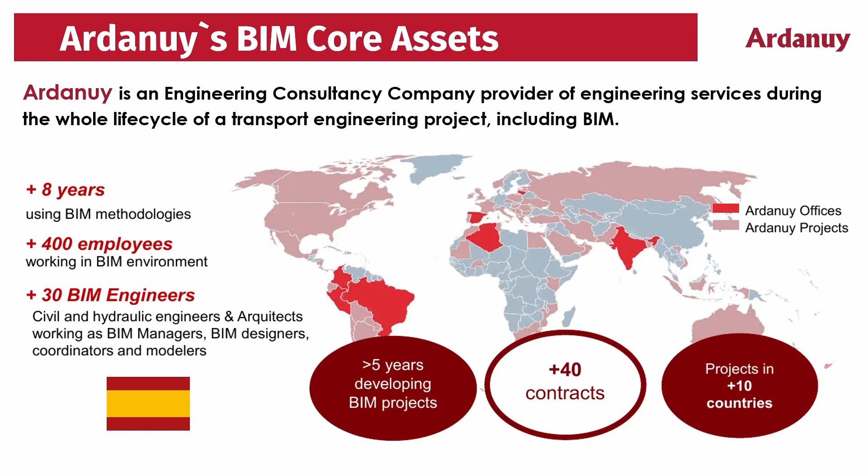Well, now we will be presenting 3 case studies. The first case study will focus on the Albarregas Viaduct, which features 2 symmetrical trough beams.

The second case study will highlight a railway bridge with multiple railway lines. Finally, we will explore practical cases of both road and railway bridges in the generation of superstructure.

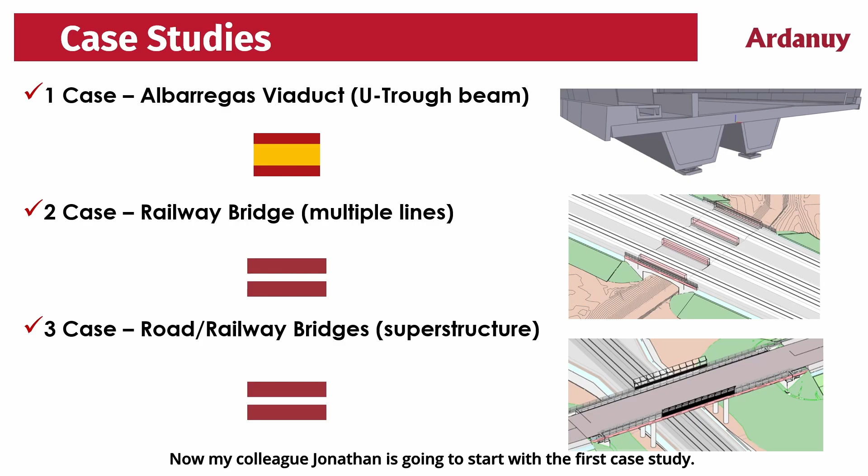Now, my colleague Jonathan is going to start with the first case study. Thank you, Jorge, for your informative and engaging introduction. As mentioned earlier, my name is Jonathan Norato, and I will be presenting the first study case.

We will begin with the Albarregas Viaduct, located in Mérida, Spain. This railway bridge spans 169 meters and features 6 double U-trough girders arranged in 6 spans.

The arrangement is shown on screen. The new bridge is isostatic and has prefabricated trough girders that are 5 meters apart from each other.

On the lower right corner of the screen, it is displayed the current bridge. However, a new proposal will be made to meet the new speed design requirement.

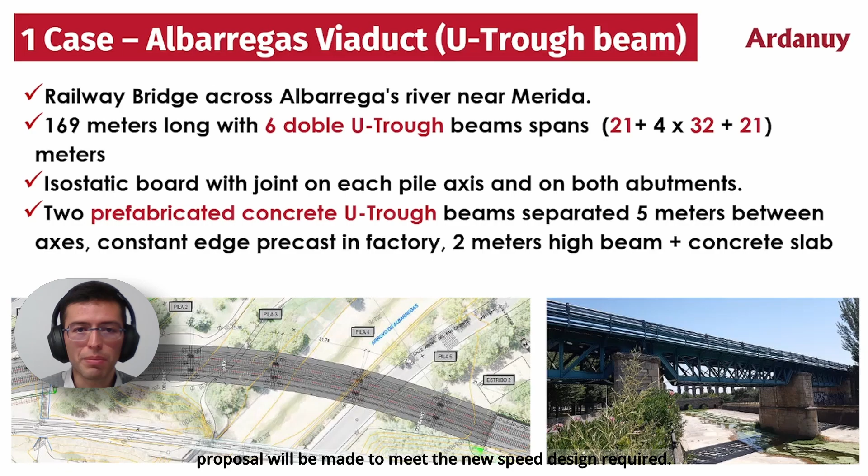To generate the design proposal for the Albarregas Viaduct using Allplan Bridge, we employed a range of tools and features.

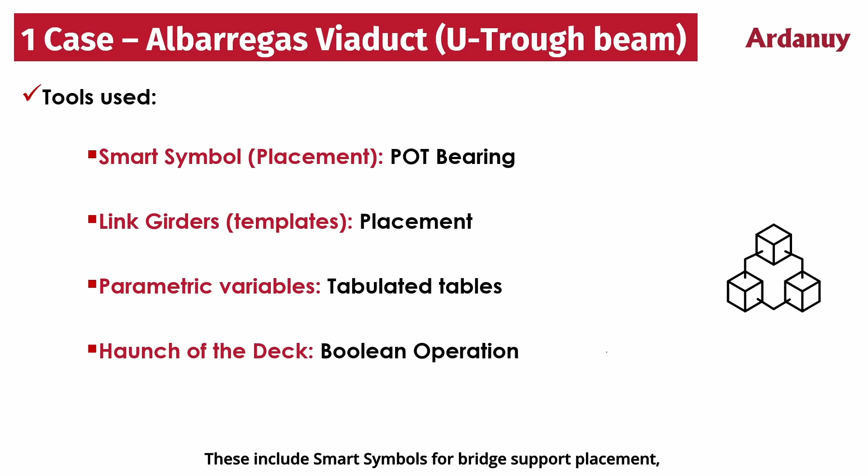These include smart symbols for bridge support placement, link girders for trough-beam modeling, the use of parametrical variables with tabulation of table, and the haunch of the deck, which allows for Boolean operations.

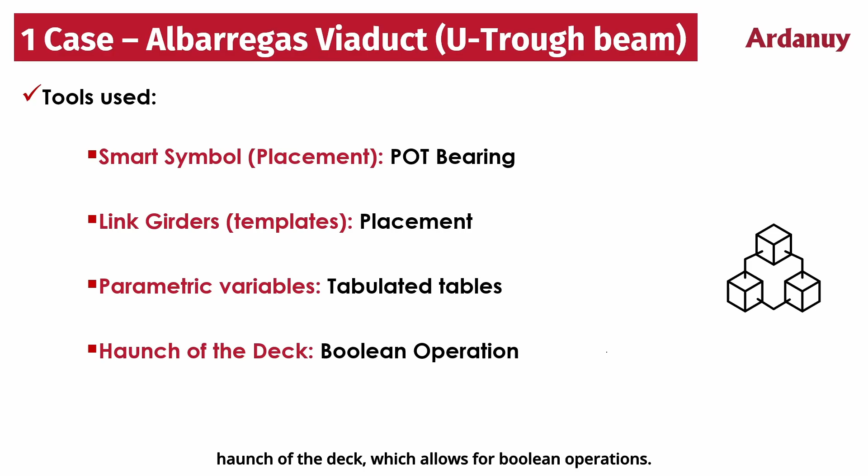As the first step in our design process for the Albarregas Viaduct, we took the axis definition, which were in LandXML format. Using this format, we were able to create an accurate representation of the bridge layout in both plan and elevation, including ground level, section, and the location of support, bearings, abutments, and other structural elements.

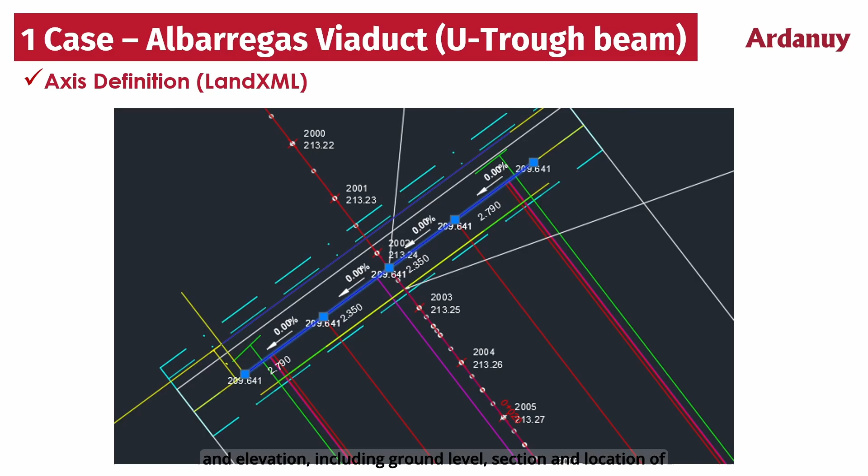This layout serves as the foundation for the rest of the design process. We use a range of tools and features which allow us to accurately define the axis for the bridge.

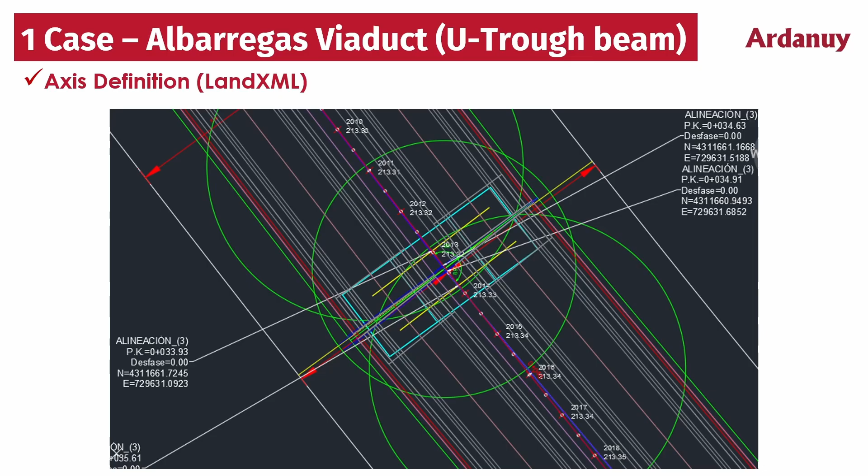Once defined, these axes were exported to an XML format and then imported into the Bimplus portal.

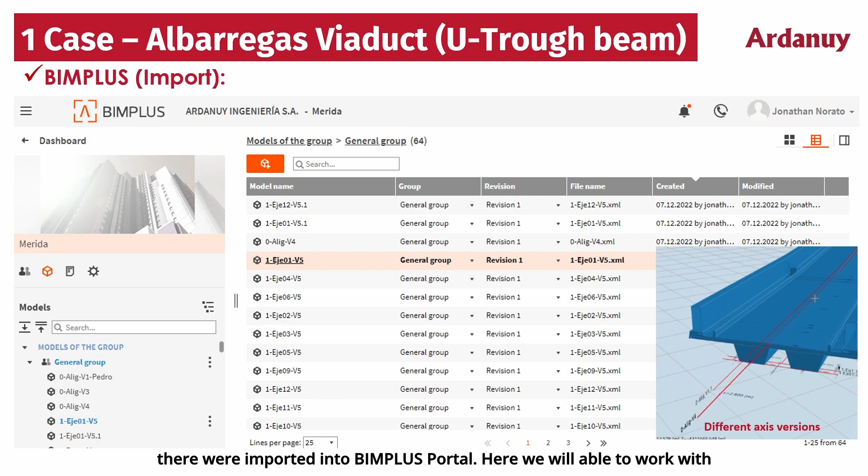After exporting the definition of the axes, they were imported into Bimplus portal. Here, we were able to work with different versions of the design and the tracks of the axis as the project progresses.

As you can see on the screen, we are currently on version 5.

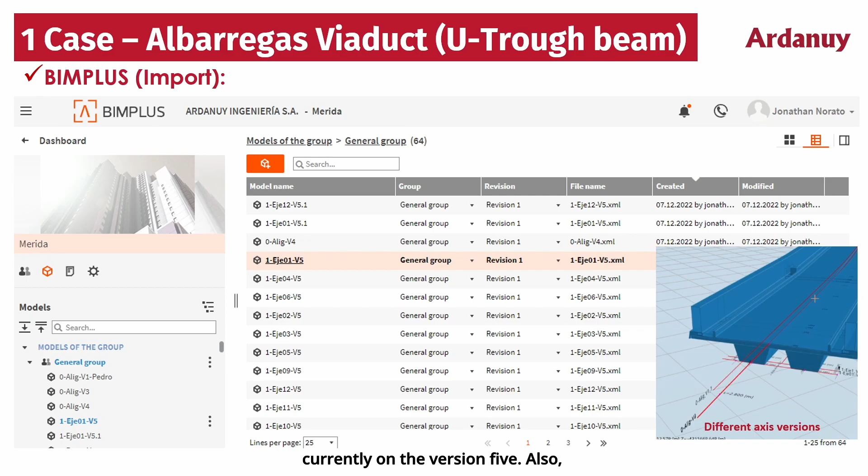Also here, I have a video of Allplan Bridge. Here we can see all the axes.

As you can see, there is the axis of the bridge, and also there are axes perpendicular to the bridge that are used for the link girders.

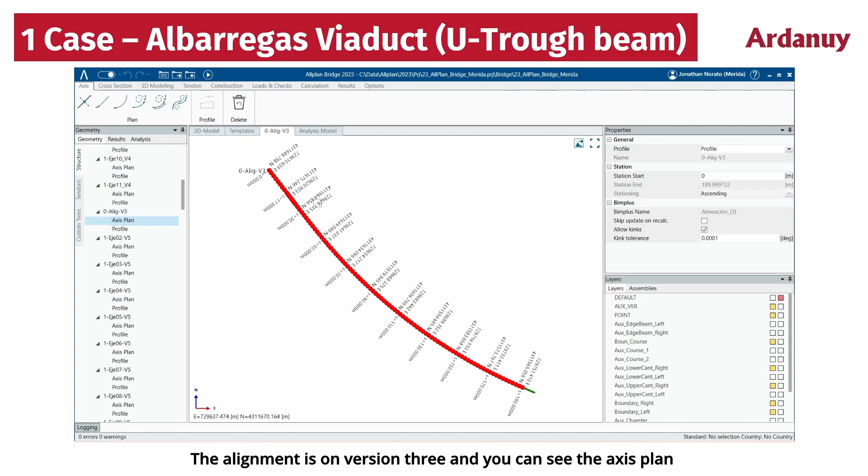And here we have the alignment in version 3, and you can see the axis plan and also the profile as shown on screen.

Another tool used in the design of the Albarregas viaduct was smart symbols, specifically for the bearing pot support. The pot support was inserted as a smart symbol using a cross section for the points located on the right. There is a reference point that allows us to choose the location of the smart symbol. In this case, the section considered was perpendicular to the bridge axis.

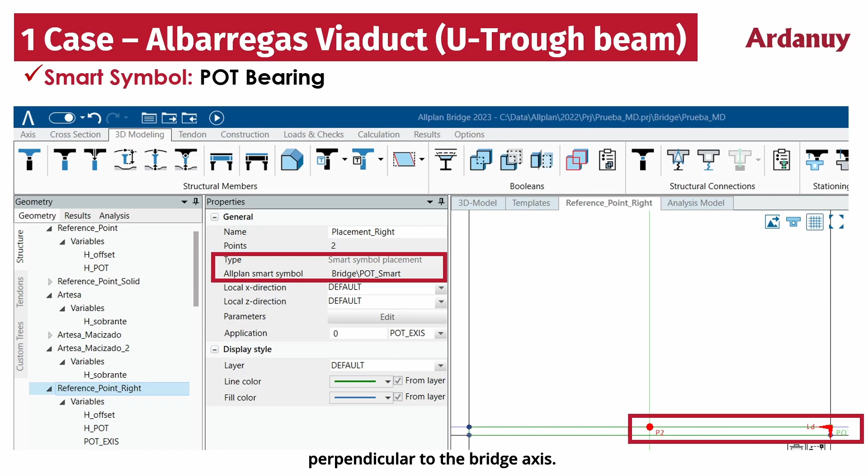Here I will show how this was done. You can see the cross section on the left side, and how the link girder was placed. When we scroll down and go to the reference point on the right, we can see the smart symbol placement on the right side of the screen.

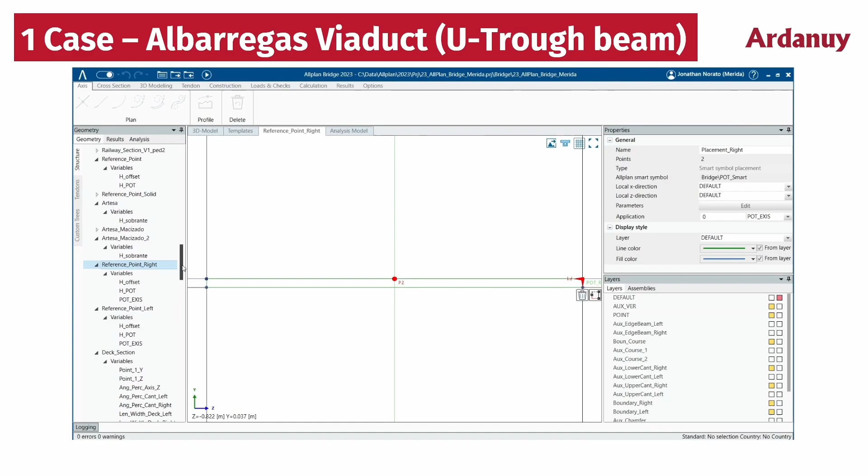We also use parametrical variables linked to tables. The use of tabulation and tables allows for the automatic generation of different lengths of beams, with the corresponding dimension being adjusted automatically.

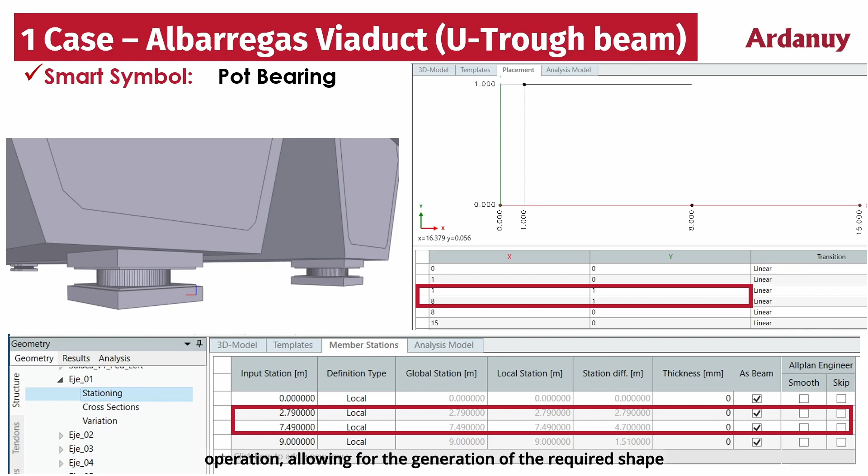Additionally, the haunch of the deck was used for Boolean operation, allowing for the generation of the required shape for the bridge deck.

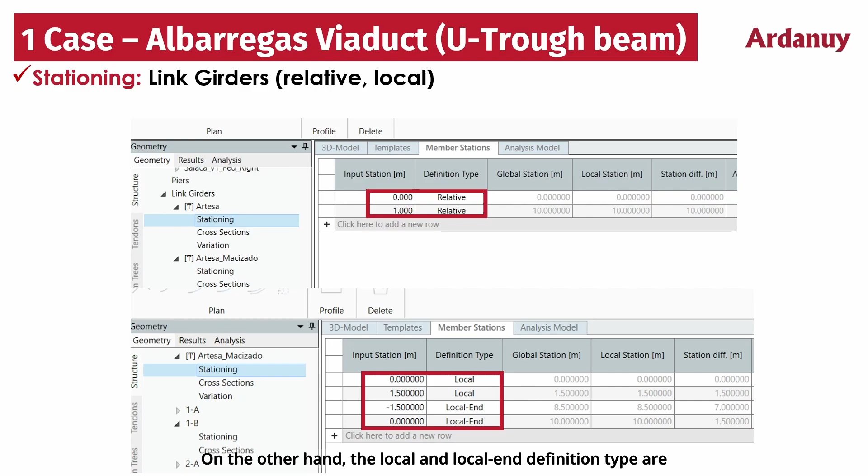We use different types of stationing. Some examples are relative, as well as local and local-end definition. The relative stationing is used when there are reference points that could change and the geometry adapts to these relative values. On the other hand, local and local-end definition types are useful when there is a fixed measure or spacing between model elements.

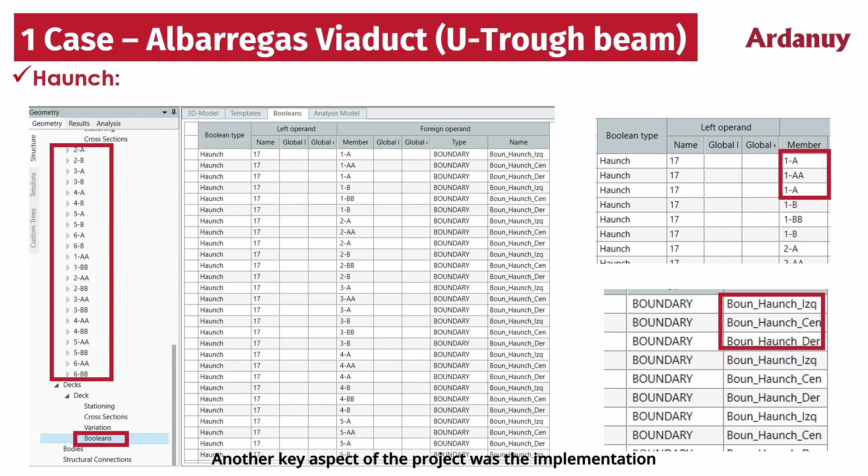Another key aspect of the project was the implementation of link girders and Boolean operation. This allows for the generation of all the necessary beams with a specific name convention consisting of both letters and numbers, as you can see on the screen.

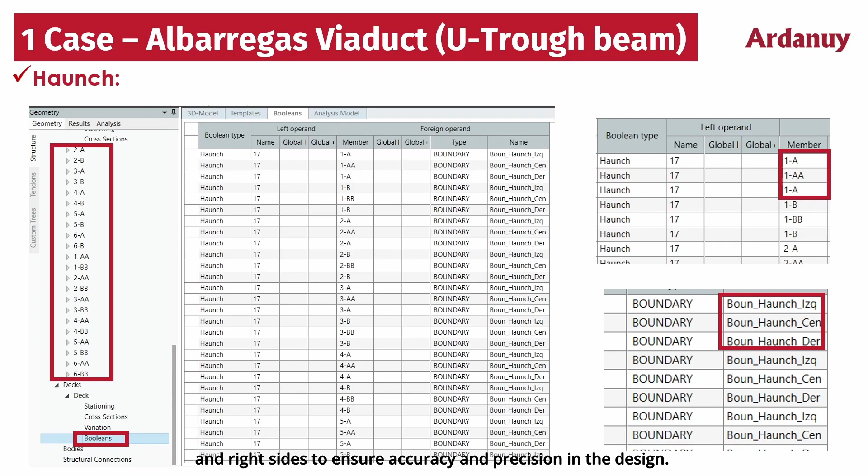Additionally, the team decided to split the haunch on the left, middle, and right sides to ensure accuracy and precision in the design. I will show an example on the next slide.

In addition to the previous function, stationing was also generated to provide a gap between the middle of the section, resulting in the solidification of only the parts near the support, while the rest remains normal, as demonstrated on the screen.

So here I can see the gap and the two sections that were used.

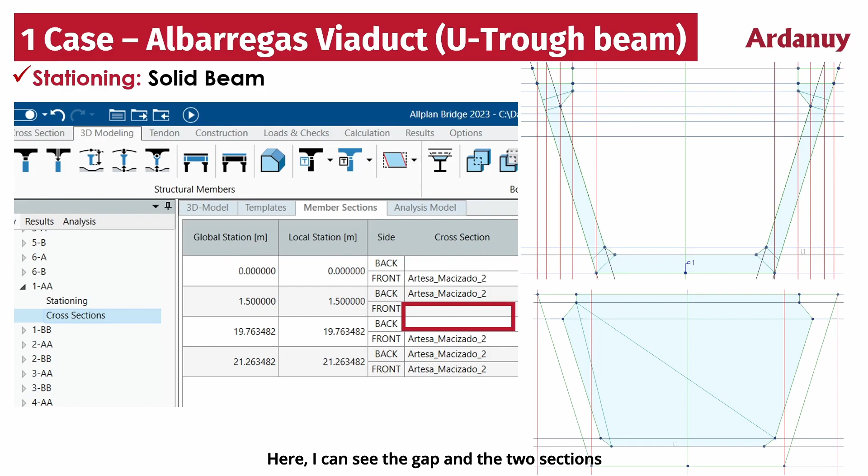On the left hand side, we can see the 3D model generated in Allplan Bridge, while on the right hand side we see the cross section of the pedestals. Finally, on the lower right hand side, we can observe the symmetrical beams.

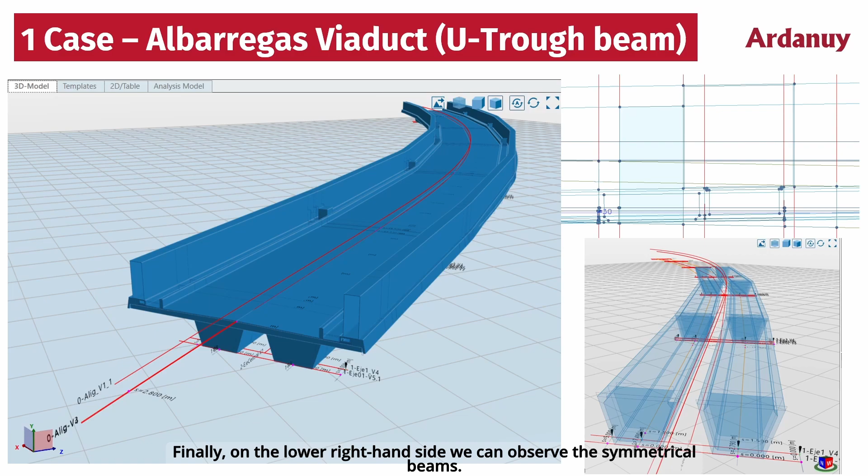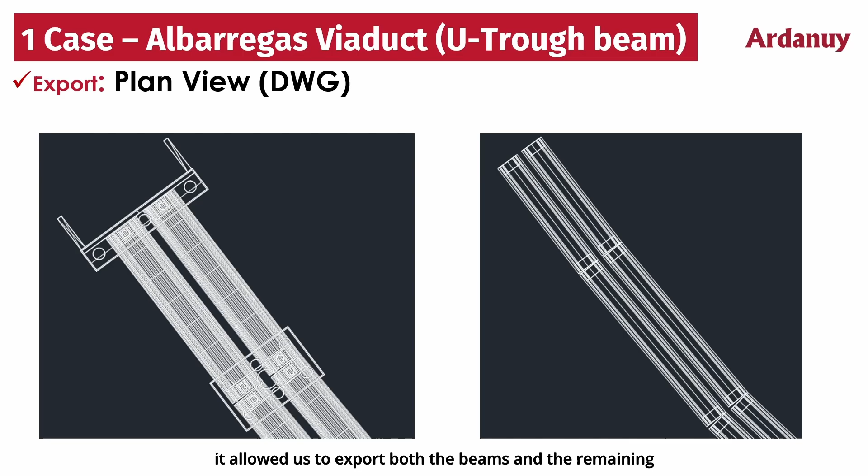Another crucial factor was the DWG export of the bridge, as it was a requirement of the client. So after generating it in Allplan Bridge and passing it through Allplan, it allows us to export both the beams and the remaining components of the plan, as shown in this image.

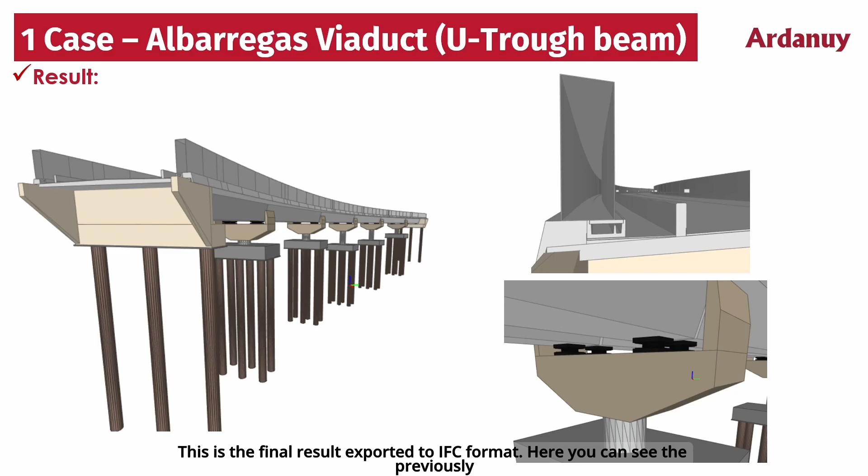Additionally, an isometric view of the entire bridge was also exported as a final output. This is the final result exported to IFC format. Here you can see the previously mentioned structure of the viaduct.

Thank you, Jonathan. Let's continue with the second case study.

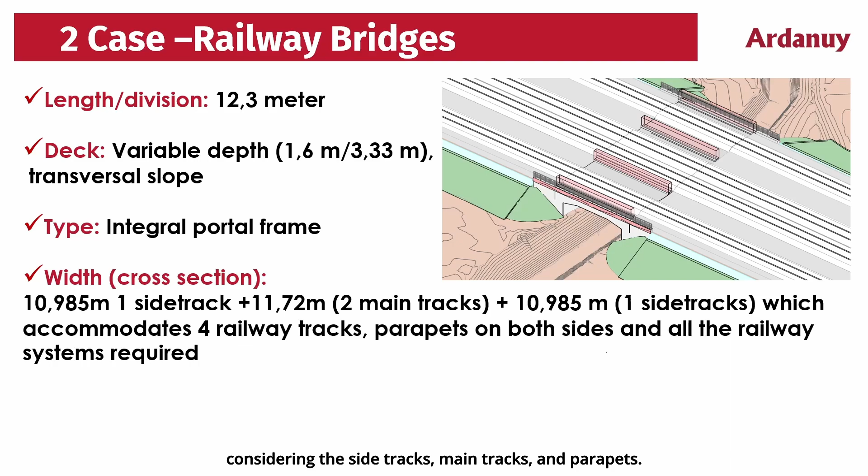This case is a railway bridge. It's a portal frame, made up of a total length of 12 meters. It also has a variable deck and transversal slope. On the screen is presented the width of the bridge, considering the side track, main track, and parapet.

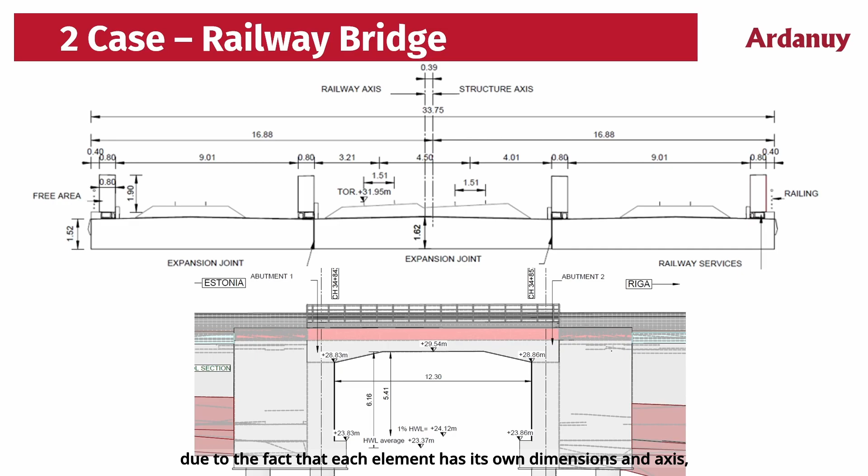In this railway bridge project, the cross-section is a challenge, due to each element having its own dimension and axis, as seen in the elevation, as we will show. This cross-section can be directly taken from Allplan Engineering. We will show how it was modeled.

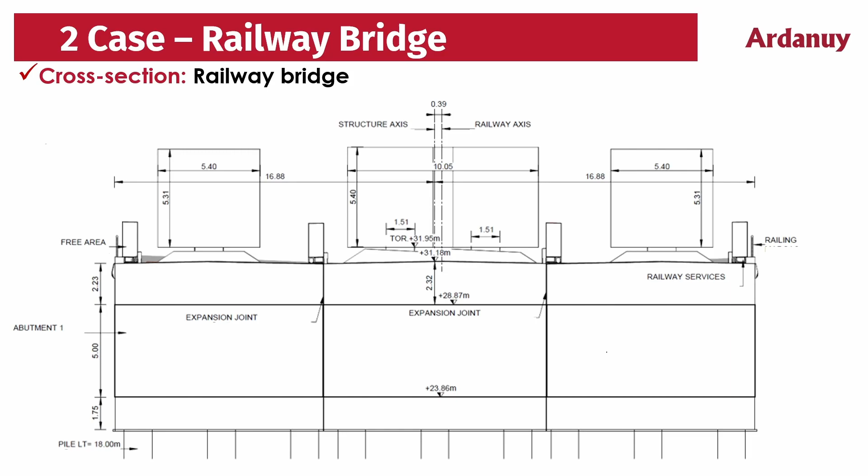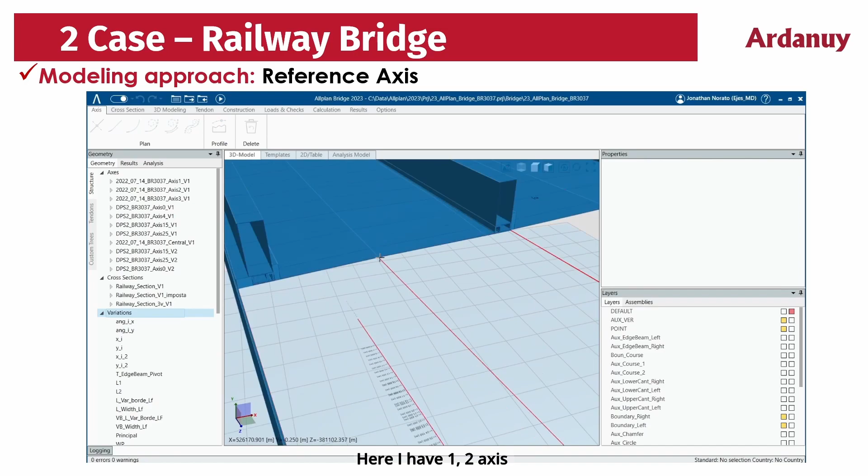We are going to present a different modeling approach to the previous case. In this case, we use a reference axis, as you can see on the screen, and then we have respective axes to some key points. Here we have one, two axes, and there is another axis that was really important to the same process.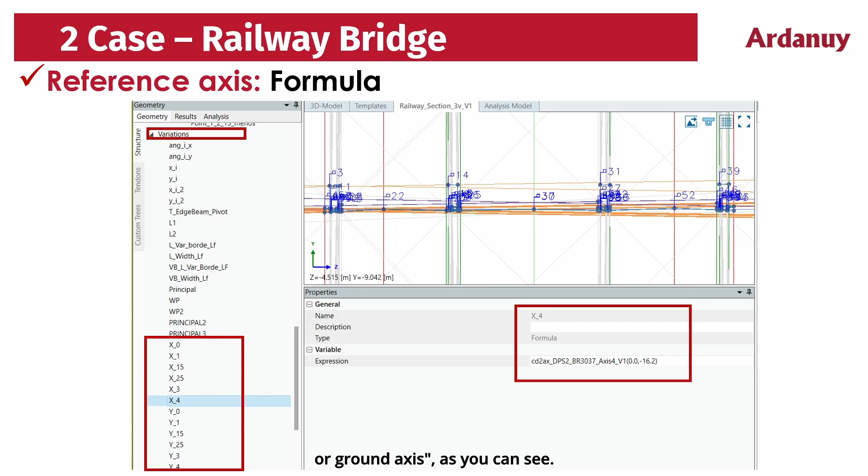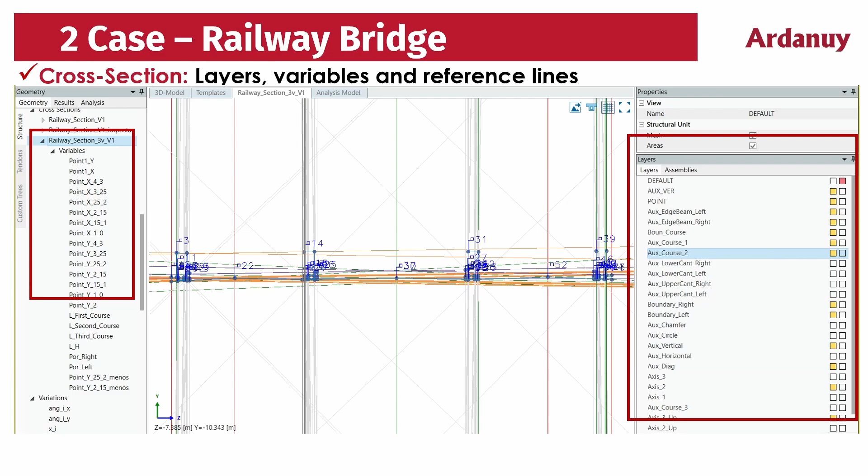Allplan Bridge layer functionality was very beneficial to us, due to the number of lines a model can have, as seen in the following image. On the left side, variables were generated, while the reference of parametric lines are seen in the central zone. In this image, we can see too some of the superstructure elements of the bridge.

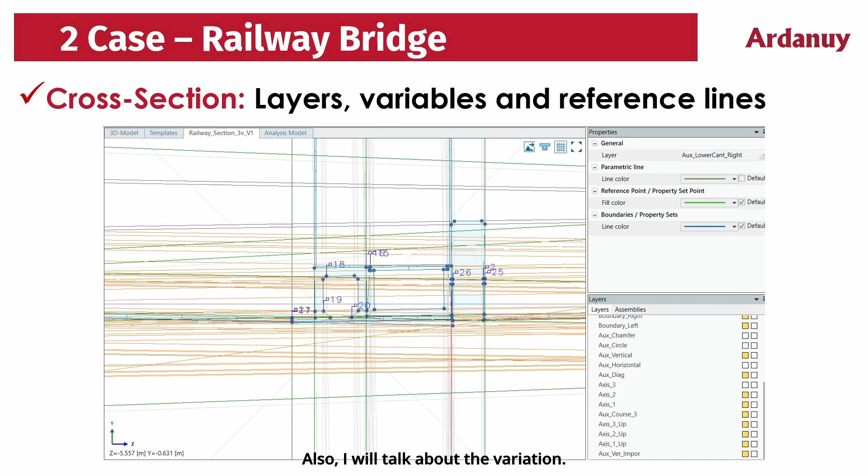Later, we will show the 3D model and how important the layer was to model this element. Also, we will talk about the variation. On the variation and cross-section tab, we can confirm that each section has a different value. This happens because the section is referent to a different axis, as you can see.

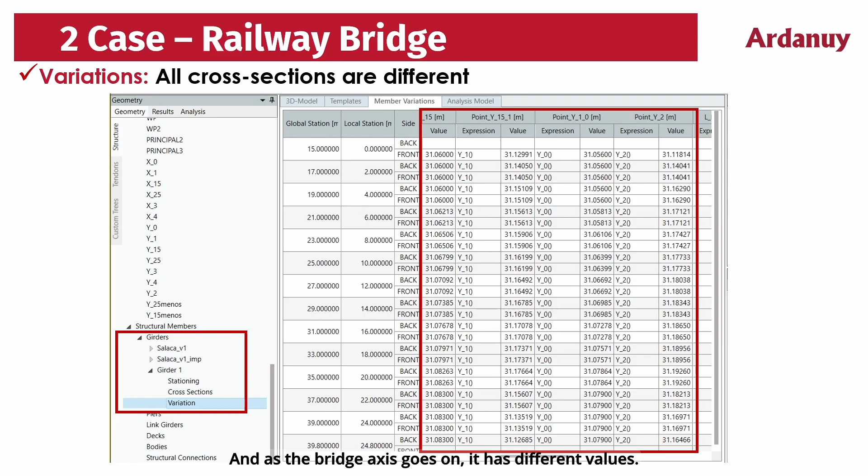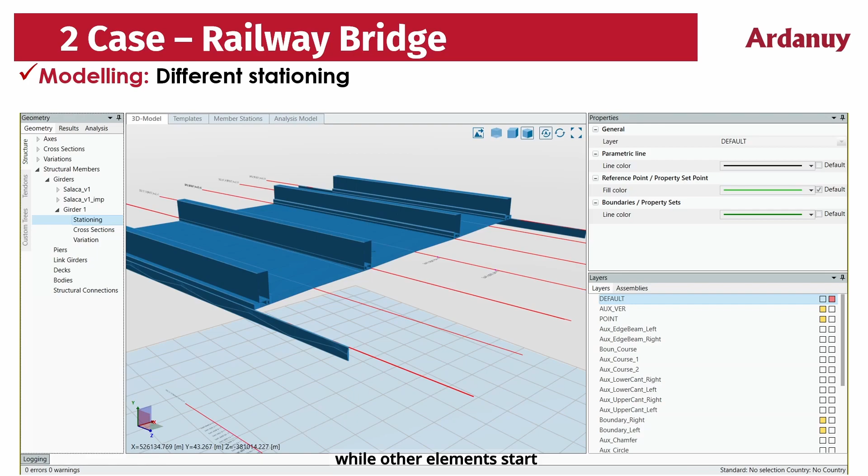We have here the expression, and as the bridge axis goes on, it has different values. For this reason, they will have different sections, and something important is that the modeling of the element has different stationing. Some elements start at some stationing, while other elements start with an offset, as you can see on the screen.

To finish with this case, we want to show you the result after transferring the Allplan Bridge model to Allplan Engineering and exporting it to IFC. Of course, with this model we can get the documentation of plan and other data. Another detail: in the model we can see that we also modeled the contour slope, so all the superstructure model fits with the 3D model.

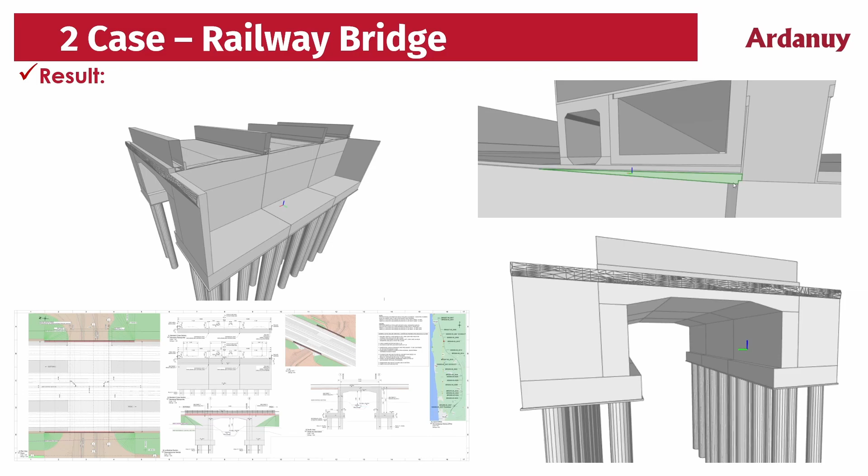Now, my colleague Jonathan will show you the last case study.

Thank you, Jorge. Finally, I will show some examples about road and railway bridges. We start with a road bridge. It is made of a total length of 50 meters with an arrangement of 15, 20, and 15. It also has a constant deck and 2.5% cross slope.

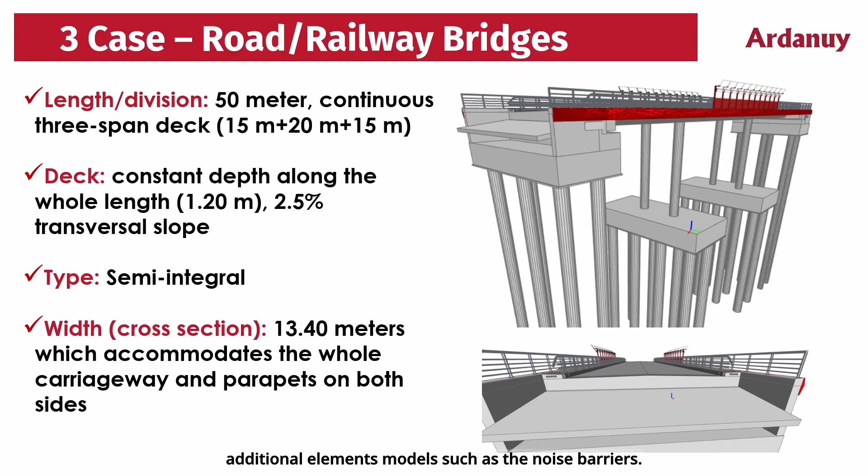This bridge is semi-integral and has a width of 13.4 meters, and it can be seen in the figure that there are some additional elements modeled, such as the noise barrier. Here I present the model of the superstructure that was used in Allplan Bridge. As you already know, Allplan Bridge allows us to have variables such as longitudinal slopes, offsets, cant, length, or other parametrical values.

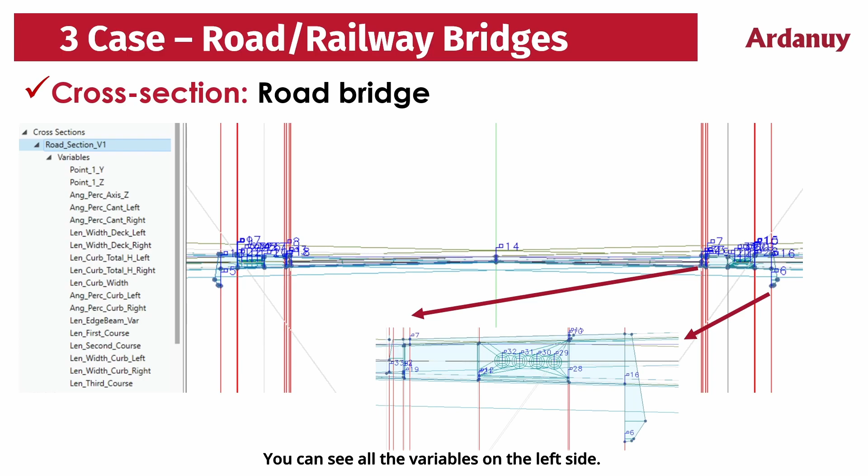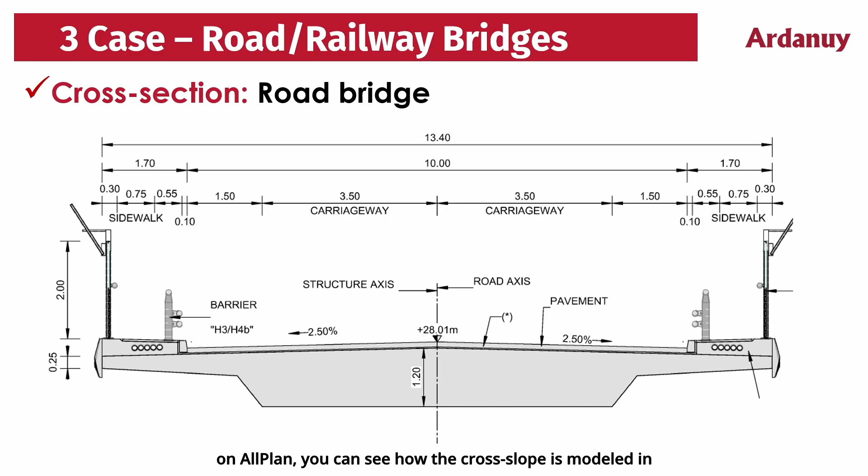This led to the possibility of reusing this section for other bridges. So you can see all the variables on the left side. In this cross-section, which was extracted from the model in Allplan, you can see how the cross-slope is modeled in detail. It consists of the deck, sidewalk, pavement, noise barrier, and other elements.

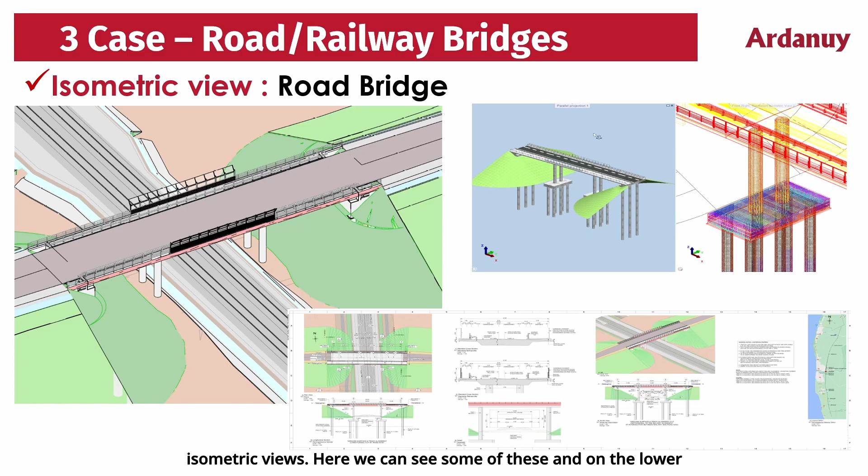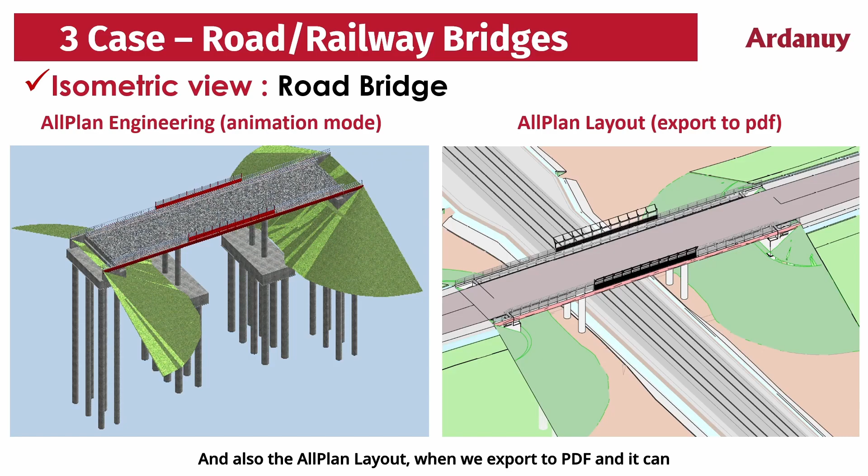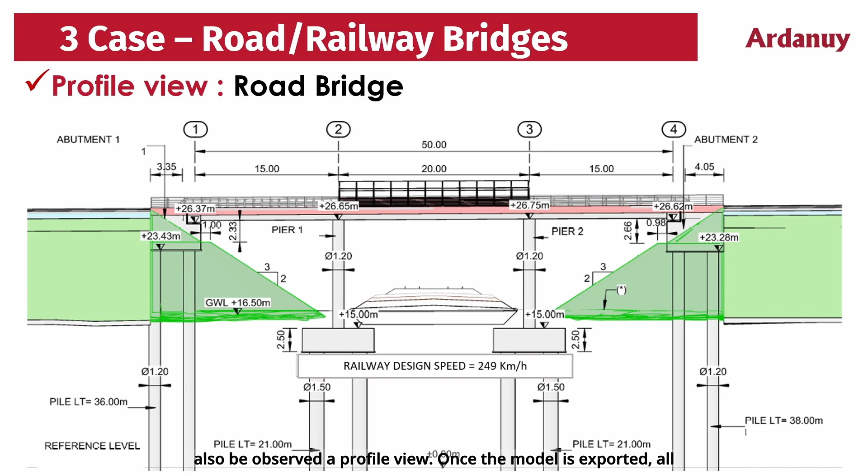Also on screen, I present some isometric views. Here we can see some of these, and on the lower side, there is a plan exported to PDF. Here we can see the animation mode in Allplan Engineering, and also the Allplan layout when we export to PDF. And it can also observe a profile view. Once the model is exported, all the dimensions are yet to be generated.

In the second case, we are going to show the railway bridge that is 126 meters long with a symmetrical arrangement. We will focus on the final result after the superstructure was modeled in Allplan Bridge and then imported into Allplan, and how the render and all the sections were taken.

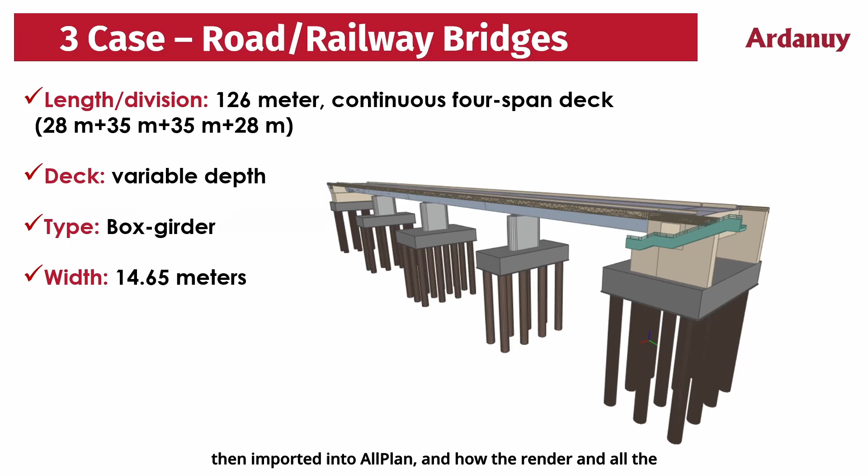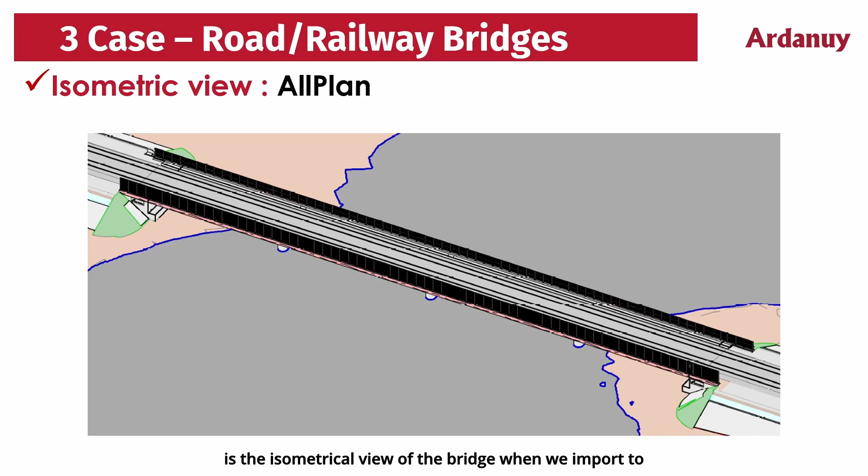So this is the model in Allplan Bridge, and this is the isometrical view of the bridge when we import it to Allplan. Here is presented the cross section of the deck, as you can see, and how this deck was complemented with the auxiliary elements. As you can see, it is a symmetrical box girder. So all the dimensioning was done in Allplan.

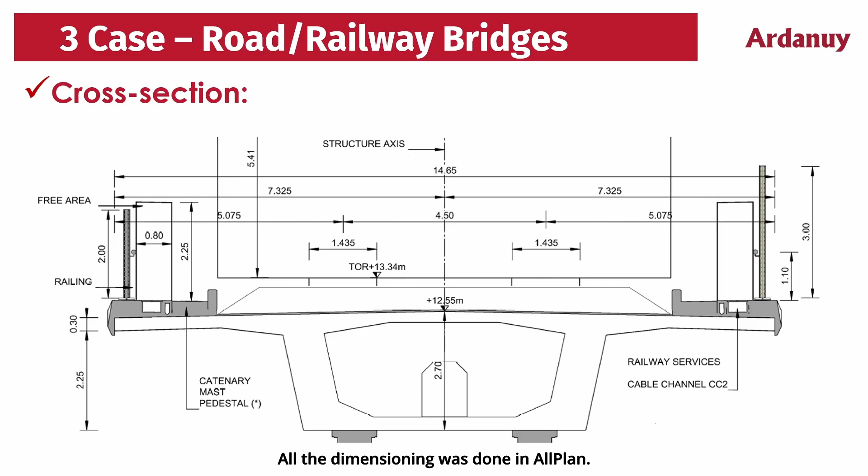And finally, we have some profile views. So we have the left and the right side of this bridge. Here you can see the profile view.

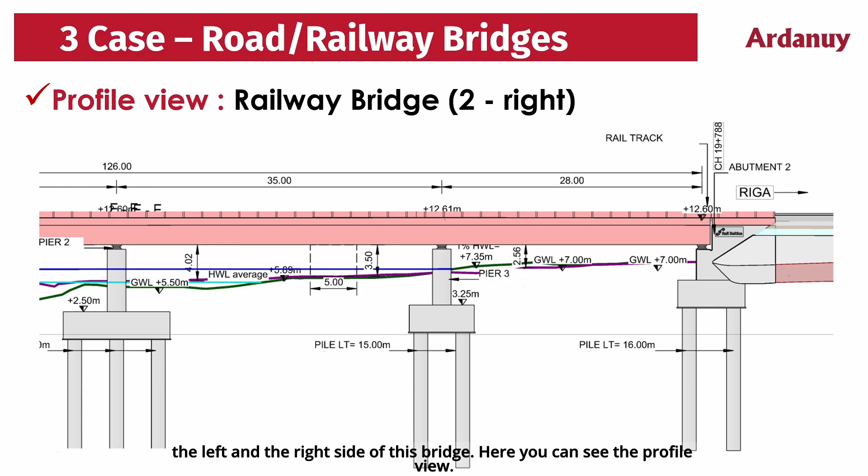To continue with the conclusion, we can say that the use of Allplan Bridge allows us to achieve great flexibility in our modeling approach. We could use features such as link girders, parametric axes, smart symbols, while also reusing some of the tools we developed. This led to the generation of link templates, cross-sections, and blueprints.